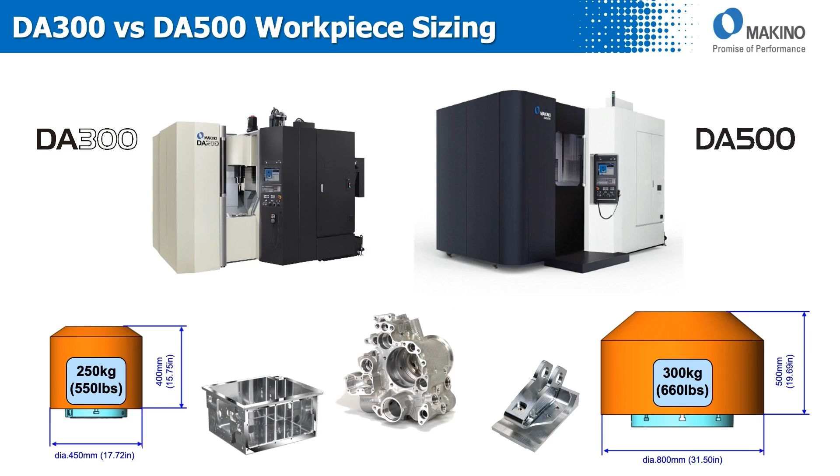That's a much larger workpiece, more capability, still full 5-axis functionality, but now we have that larger machine platform to take maybe something that was just a little too large for the DA300 and take it up to the DA500. Here's the standalone layout for the machine. Good access to the operator area, clear access for the operator to get inside the work zone.

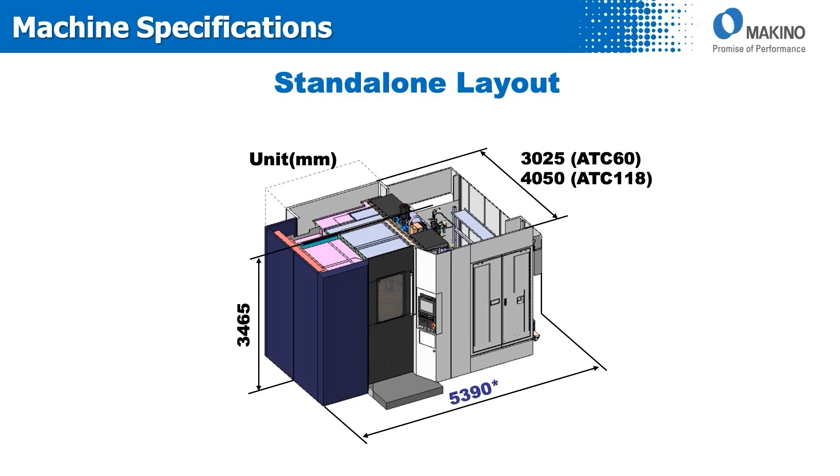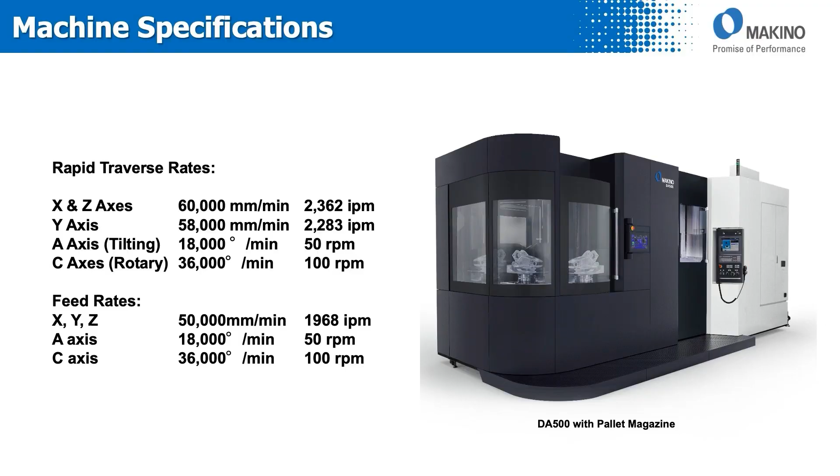You'll notice also in this slide, we showed dimensions for a 60 tool magazine and the 118 tool magazine. On the rear side of the machine, you can see that the entire length of the machine is just over 5 meters long. That also includes the lift-up chip conveyor. Here are some basic specifications for the machine itself. Here's a small animation showing the kinematics of the machine.

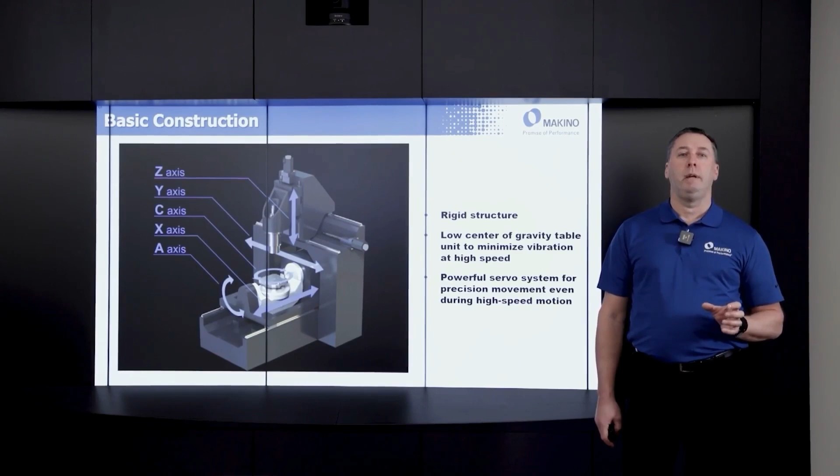If you look at the structure, the vertical structure of the machine, you notice the columns on either side of that x-axis. Those are very large, heavy columns, lots of mass, as well as the lower section for our x-axis provides a very low center of gravity for that workpiece as it's moving. Along with a powerful servo system, this gives us that very tight precision movement, even when we're moving at very high speeds, moving that part around, trying to get to different features.

Looking at the construction, let's take a look at the y-axis construction. You'll notice on the y-axis, we have one single ball screw, but we actually have 2 servo motors on there. Those 2 servo motors allow us to get twice as much power in that same area of the machine itself. We have 1 screw, 2 servo motors, much quicker positioning capability, much better accuracy, reduced torsional wrap-up of the y-axis ball screw.

For the x-axis, we have a very large moving mass there. So in the design of the machine, we have not 1, but we have 2 ball screws for the movement of the x-axis. 2 ball screws, 2 independent servo motors for those, working in tandem together.

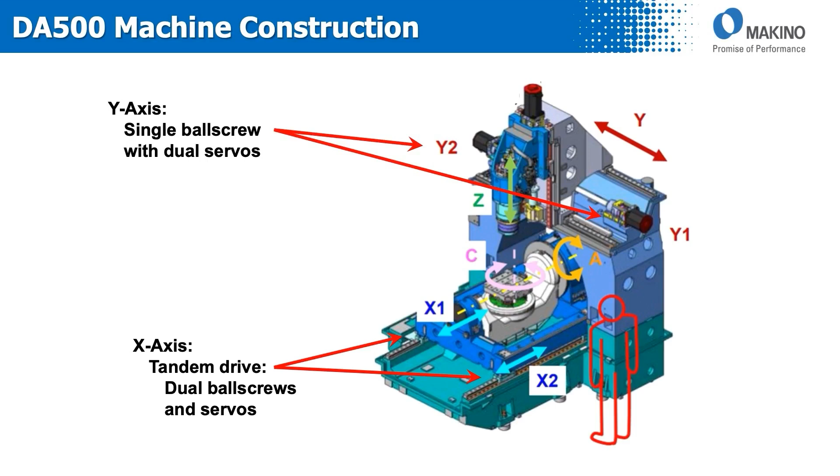Let's look at the column structure for this machine. In the left-hand view, you'll see a traditional design for a vertical machining center. You have the column base, then you have a saddle attached, and that saddle facilitates the installation and movement of the spindle further out front. In this arrangement, you'll notice that the spindle is a significant distance away from the column.

Looking at the DA500 on the right-hand side, they've taken the saddle and installed it on top of the column, thereby reducing the amount of overhang for the spindle. This provides a much more stable structure, better performance, better cutting capability, better surface finish.

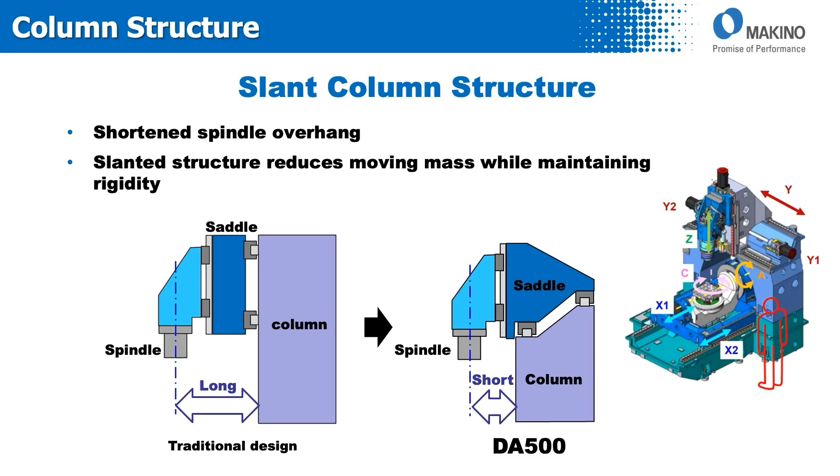Looking at the work zone also, here's full 5-axis motion. We've rotated the A-axis around, and you'll notice that as you're cutting, you have clear access between the workpiece and the lower part of the machine where the chips are evacuated in the center trough. This gives great evacuation for any material that's passing through the machine. So if you're doing large, bulky milling operations, billet, lots of chip removal, lots of material removal, we have the ability, as soon as those chips drop, to evacuate those chips right out of the machine.

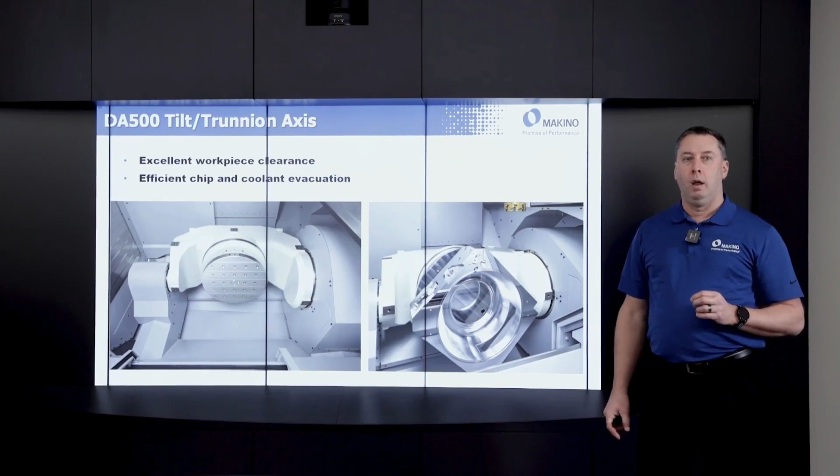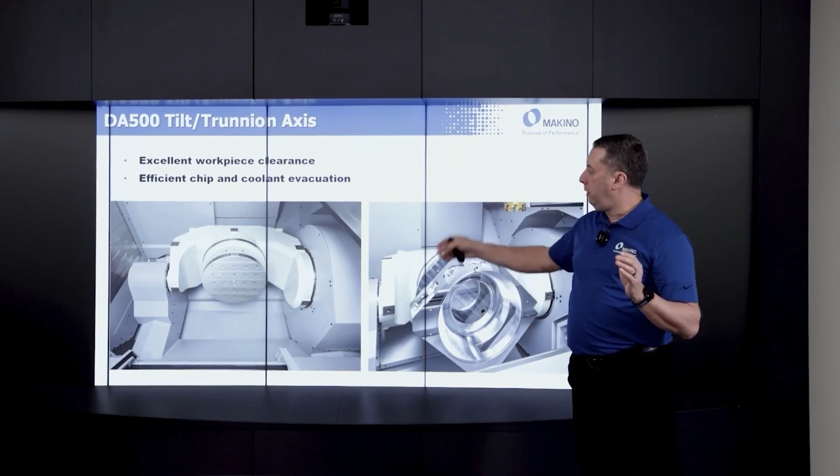Another thing to note also is, if you look at the perimeter around the sides of the machine, you'll notice that the walls are almost perfectly vertical. That way, we have the ability to shed that coolant very quickly, get it returned back to the coolant tank, evacuate those chips outside the machining area, and continue on processing without having to go back in, periodically cleaning anything out.

Let's talk about the trunnion construction. Many of the trunnions, more traditional design, those trunnions, they're looking at the motion. They're looking at taking that movement, getting that access to the workpiece itself. But they're not thinking about what it's doing as far as the center of gravity. That center of gravity is extremely important. We're trying to control that inertia at very high speeds.

What Makino has done in the design of this machine is we've lowered that center of gravity. You'll notice in the machine design, that A-axis is actually set down inside the X. We've taken that center of gravity and shrunk it way, way down. That way, we're controlling that inertia. We're controlling where that mass is moving. And by not having that mass hanging far out, we're able to provide a much better accuracy using this machine at higher speeds.

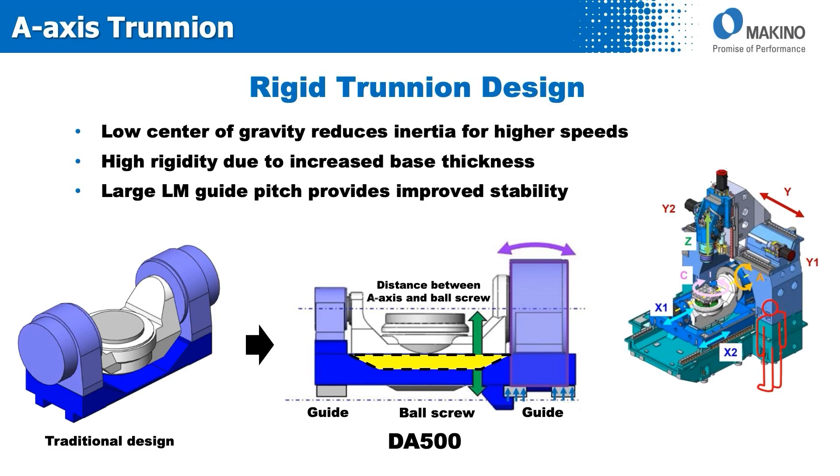Along with this, since we are moving at relatively high speeds with this machine, they've also implemented some other functionality in the machine to help control thermal stability. We're moving along pretty fast. We have 2 servos on that Y-axis. We have 2 ball screws and 2 servos on X-axis. The last thing we want to do is start to have some sort of thermal deformation for this.

As part of this machine's standard, we have shaft cooling on our ball screws. That means we're taking cooling oil, which is controlled by a chiller that's being monitored throughout the rest of the machine, monitoring that machine temperature. We're passing that oil through the ball screws, we're passing that oil through the support bearings, and we're controlling that thermal stability, any of that thermal growth for any of this axis, any of that motion. This helps to increase that positioning accuracy considerably.

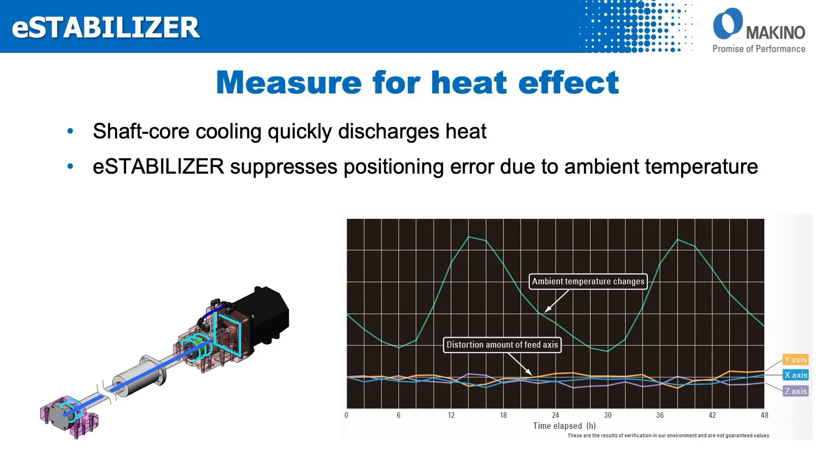Along with this, as you have your machine in an environment maybe where you have not such a great ambient temperature control, there's also a function called eSTABILIZER. That eSTABILIZER helps to suppress some of that positioning error as you see your temperatures fluctuate throughout the day.

Table and pallet specifications. We can do this machine in several different configurations. If you look far to the left-hand side, this configuration here is actually a physical table with clamping cones very similar to like a traditional pallet change style machine. In this configuration here, we have a square pallet on there, and that square pallet, even though it is square, it does have turning capability.

And that pallet can be taken on and off of there if you have several pallets, different workpieces, and you need to exchange those throughout the day. We have that ability to take those on and off of there. And this is a standard as it comes on the machine as we configure it here for our US market.

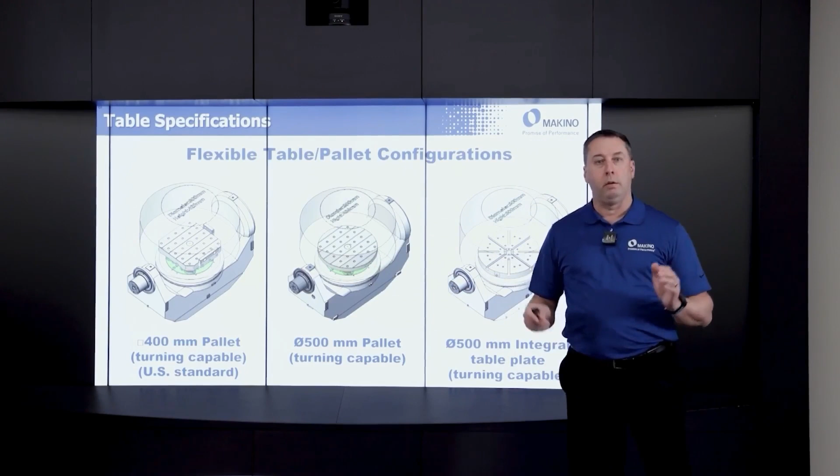In the center, new to this machine, we have a turning pallet. They made this pallet specific to the turning capability of this machine. 500 millimeter diameter, round pallet, perfectly balanced. One thing to note is that the cone pitch between these 2 pallets is identical, 200 millimeter cone pitch.

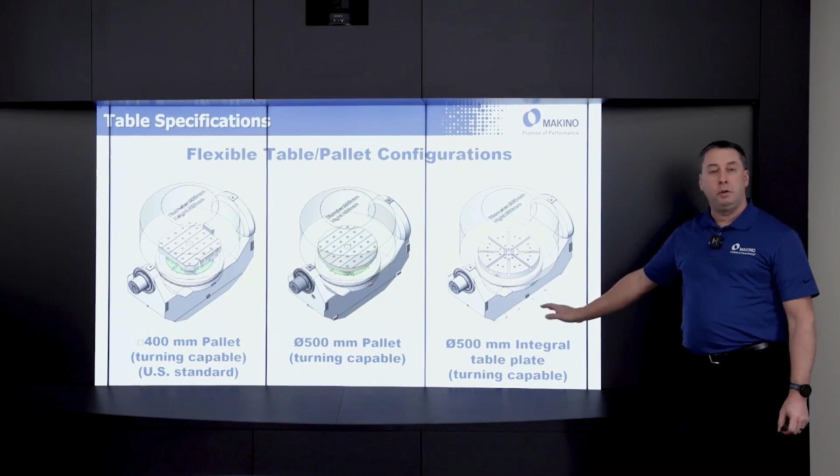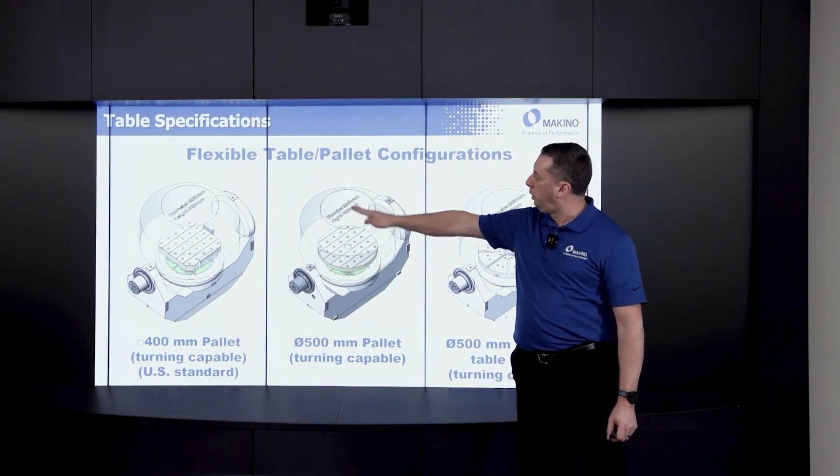The last option that we have is a fully integral table pallet configuration, meaning that this table is integral with the axis of the machine. This gives us the maximum height of the workpieces. You'll notice at the tops here also we have the maximum heights listed. The 400 millimeter pallet is just slightly taller, so we lose a little bit of workpiece height. Go to the 500 millimeter round pallet, we gain a little bit more, and if you need maximum workpiece height, you'd have to have some sort of an integral table configuration.

Here's a little bit better view of these workpieces. One thing to notice also is that we have full 800 millimeter diameter capability all the way across the product line. A little bit of variance in the overall height as far as your maximum workpiece height.

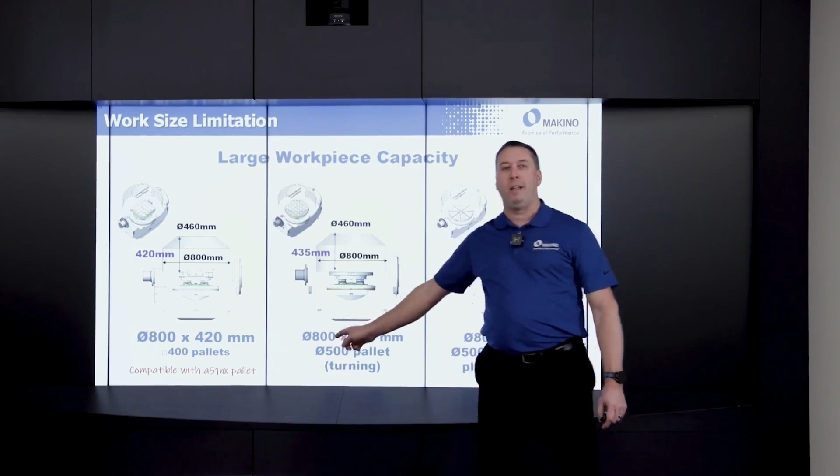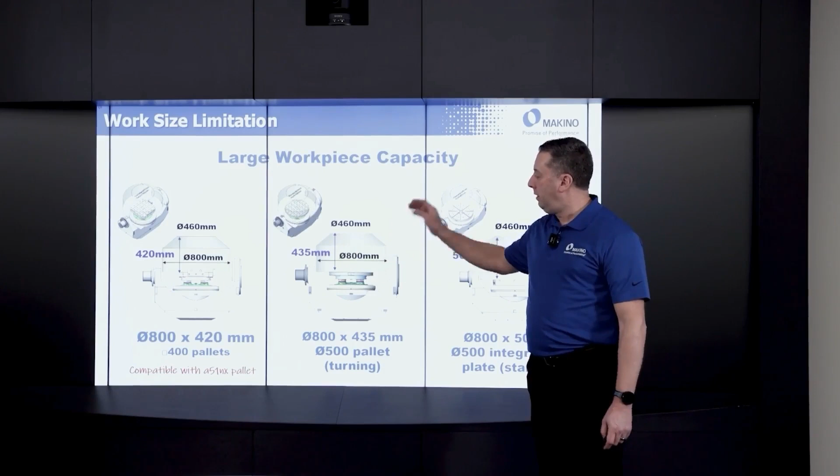But one thing to notice also is that this pallet, that square pallet that's on that machine, that pallet is fully compatible with our standard A51NX horizontal machining center pallets. So if you have work that you have turning requirements on or full 5-axis motion requirements on for machining, you can take that pallet and put it inside this machine, and it clamps up the same way it would on your horizontal machining center.

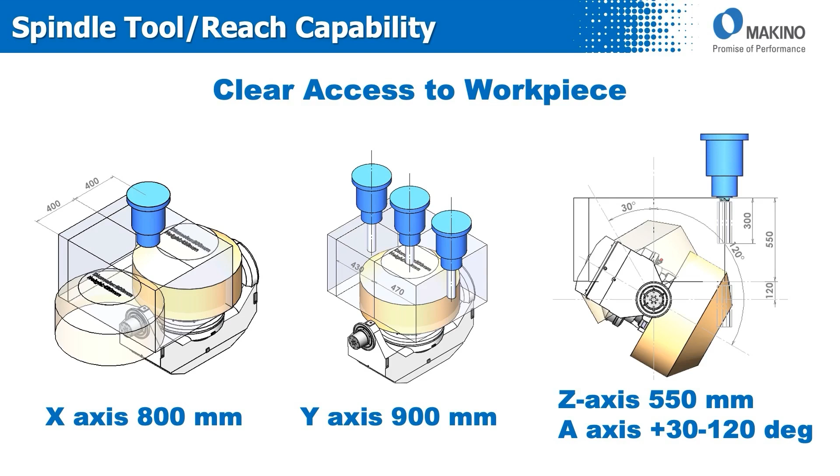Here's that 500 millimeter pallet we were talking about. As compared to the 400 millimeter square pallet, this pallet is just slightly shallower, a little bit less height on it, gives you a little bit more workpiece size, and it is round to help facilitate any kind of turning or full 5-axis motion.

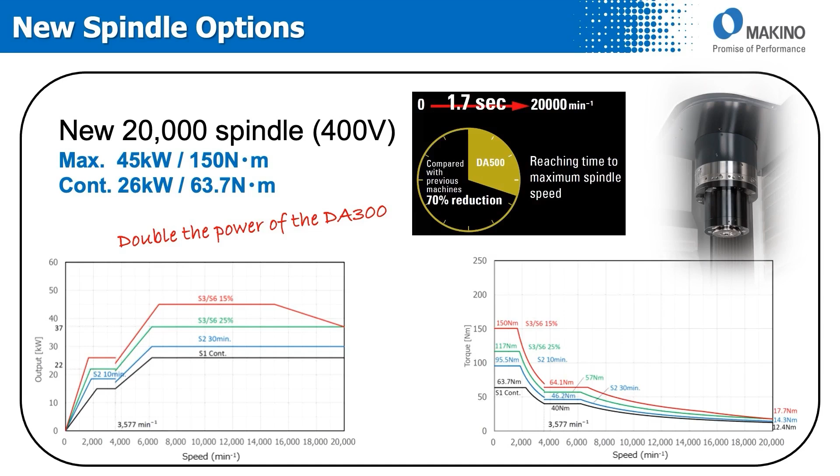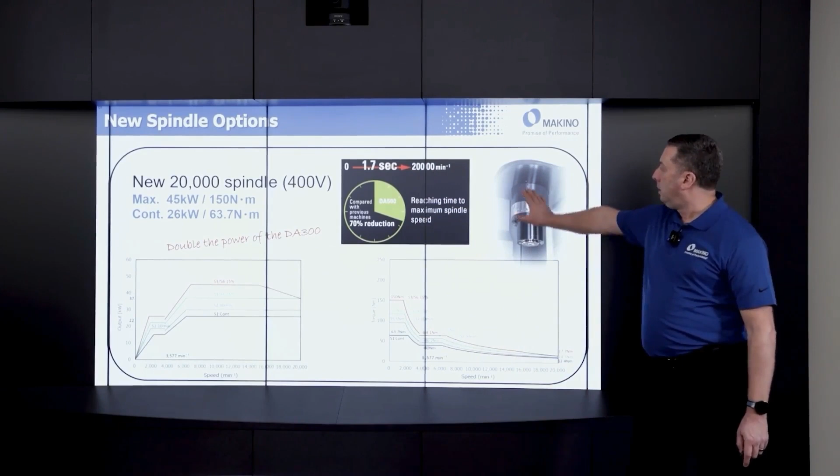Okay, this is where the special parts of this machine really come into play. When they designed this machine, they've designed brand new spindle options for this machine. This machine now comes standard in our market, if you were to purchase it, with a 20K spindle. And you'll also notice that power capability of this spindle is absolutely incredible. That's due to the new designs of the spindle, new arrangement, very good steady torque curve, different levels of running it at different capacities, and also very quick 0 to 20K ramp up time for that spindle shaft. Remember, when you're changing tools, when you're exchanging things back and forth, these non-cut times really come into play. This makes a very big difference in part processing.

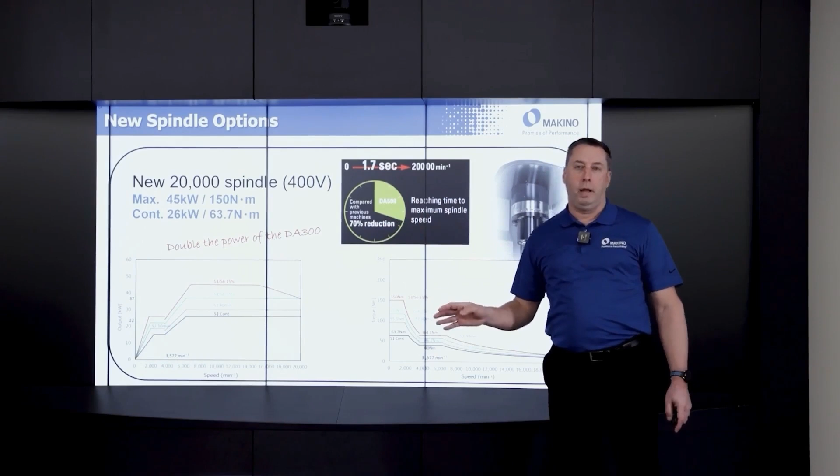If you're doing work where you require maybe more torque, got heavier applications, other different types of material, we also do have a 14K spindle option available as well. And we have some other product families out there. These power curves are very similar on this 14K to the 14K spindles in our a500iR horizontal machining center. So like I said, a little bit higher torque with the 14K versus the 20K. Just depends on the type of work that you're doing.

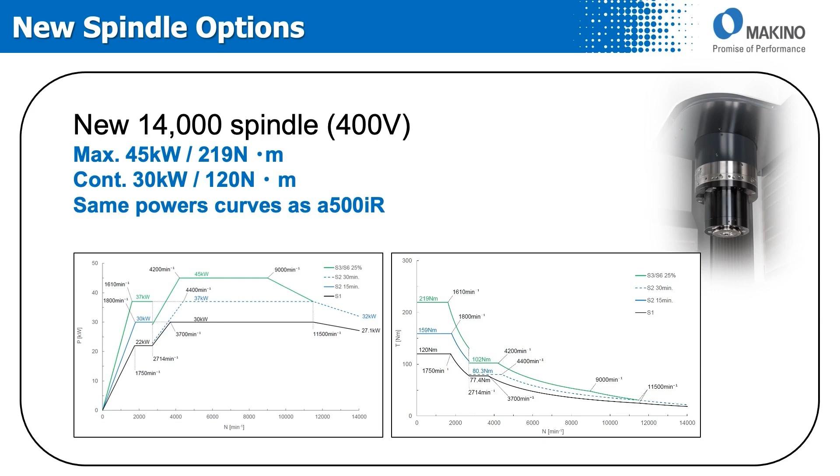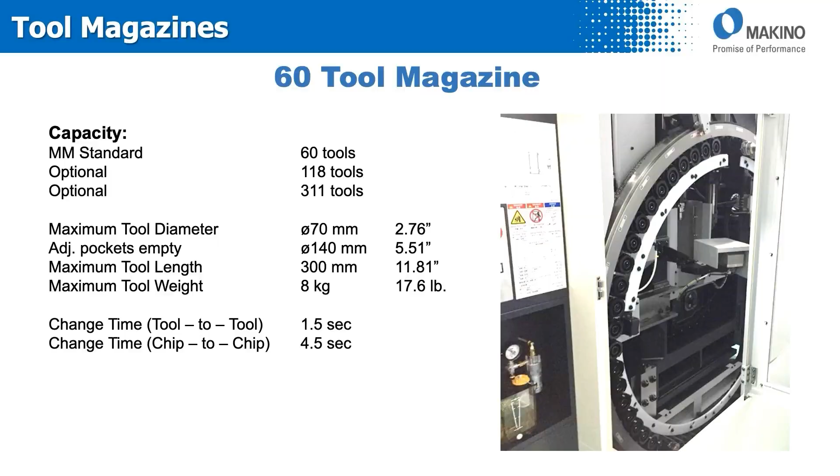Talk about tool magazines. Being that this machine has a really great degree of flexibility, we also wanted to provide the necessary tools for whatever your application is. So we can show here basic standard on the machine, 60 tool capacity. We show the diameters, length, tool change time, chip to chip, relatively quick. Along with this, we have the ability to take this 60 tool ring and now expand it to 118 tools.

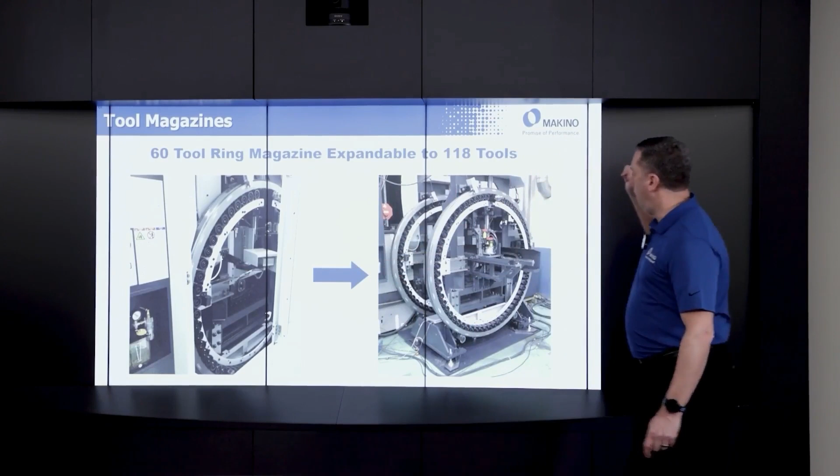So it means you can buy this machine as a standard with a 60 tool magazine. Later on, if you decide to put automation on the machine, add a pallet magazine, do other things with it, repurpose this machine, and as you grow, this might be something that's appealing to you. You can go from that 60 tool magazine up to 118 tools. And this magazine expansion is fully retrofittable in the field.

If you want to go one step beyond, you're intending to put this machine in a large automation environment, pallet magazines, robot automation, whatever it may be, and you have a very large family of parts that you're passing through here, you're going to need a large tool capacity for this. In this case here, we have a relatively new design for this. It's a 311 tool magazine, and this is fully integrated with the machine.

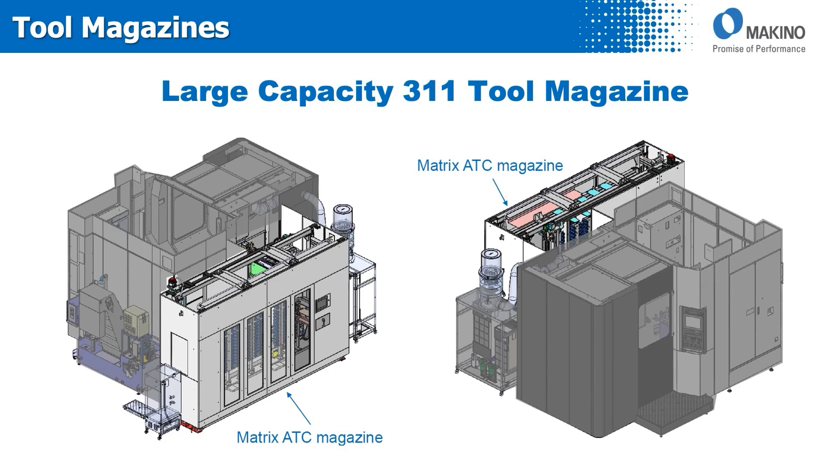We also have an HMI out at the tool magazine itself. The HMI allows you to go through, select tools, read in, read out, look at the tools in a tool load station on the side that allows the operator to pull tools out very conveniently, very easily, access those tools, change them out, service them, whatever is required.

Okay, we talked about the DA300 early on in this presentation. Something that's unique to the DA500, not incorporated into the design of the DA300, is turning spec capability. On this DA500, we have now incorporated the ability to do full turning operations on this machine. So not only do we have full 5-axis machining capability, now we have full turning capability as well.

So up to 800 RPM as far as the workpiece rotation, 800 millimeter diameter, 435 millimeter max workpiece height with a round pallet, and also 300 kilograms of payload capacity. That's a pretty large payload that you're spinning around if you think about it at 800 RPM.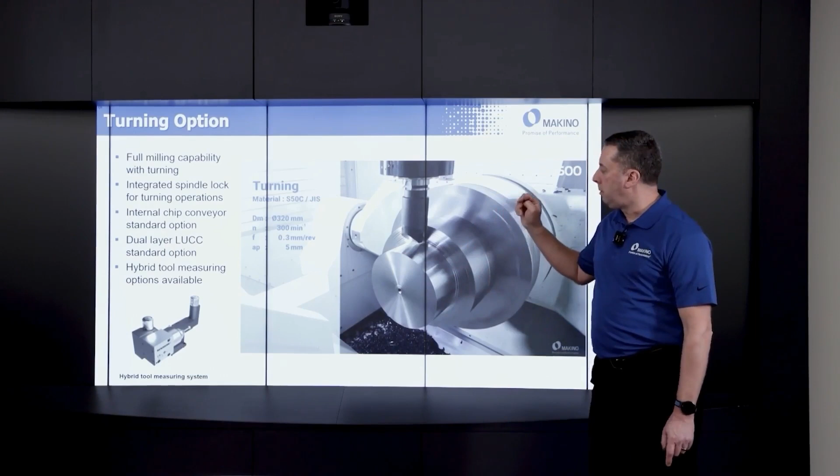Along with this, because it is more of a hybrid operation where you're going to have milling and turning, you're going to need some sort of a measuring device that's going to be able to do that for you in both fashions. We do offer options for hybrid tool measurement, laser tool measuring for typical milling operations, as well as some sort of single point measuring devices for your single point tooling for the turning operations.

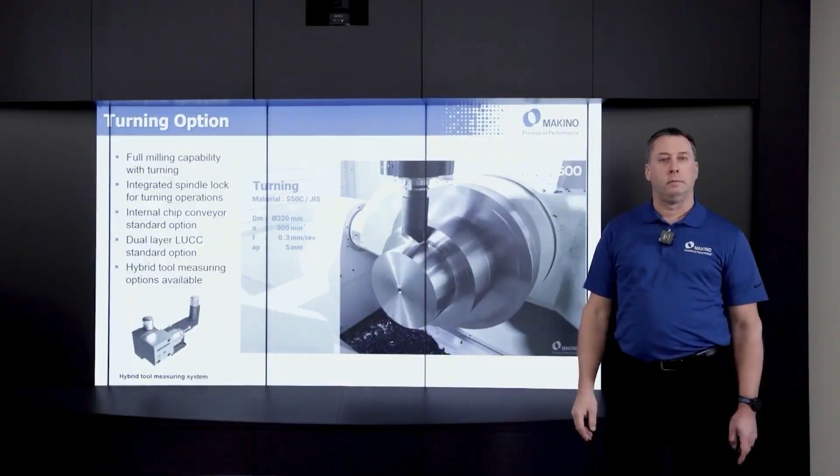Some of the other features that go along with this, for people that are more used to milling or more used to turning, since this machine does incorporate multiple facets of that, milling and turning, they wanted to make sure that when you're in either operation, you have that ability to fully understand what's going on. In this case here, if you're in milling only operation, we show a blue background or a blue banner at the top of the control panel. If you're in a turning operation, we show a green background. Very clear, very easy to understand when that's going on.

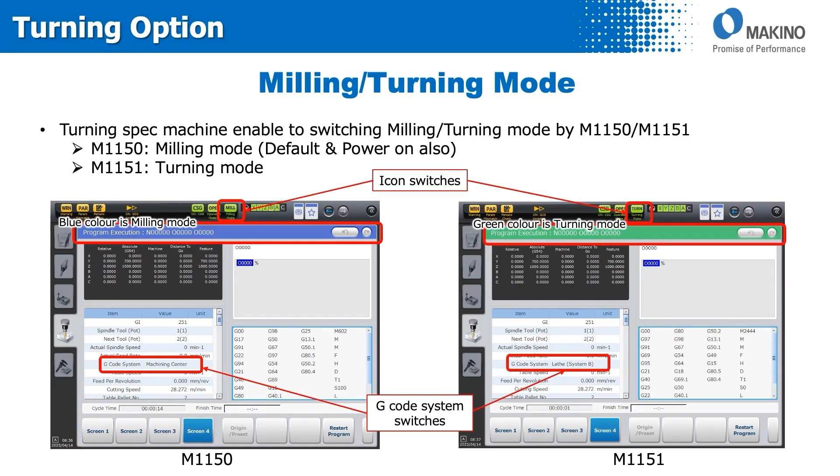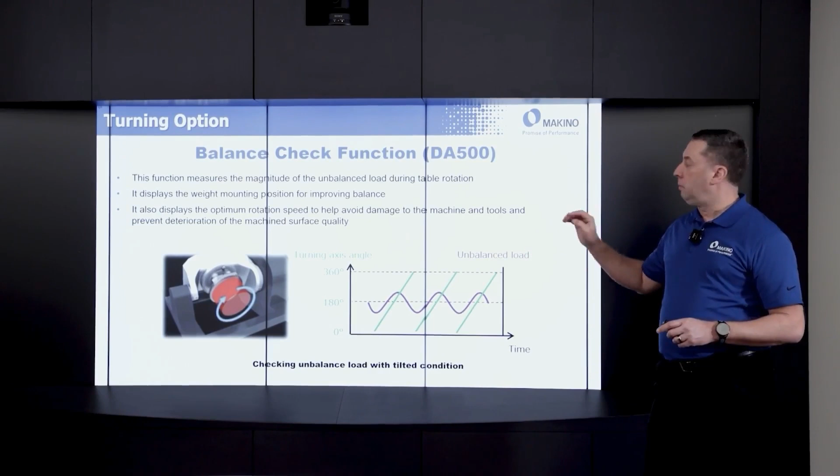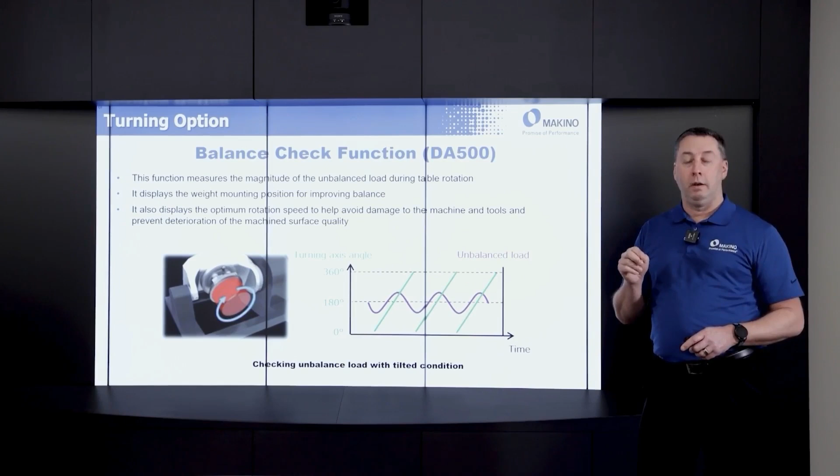We also incorporate other functionality into this, knowing that you could have potential for maybe unbalanced work pieces. You could have some changes in the mass of work pieces as you mill away and then have turning operations. We have a balance check function that's incorporated into this. And you can go through and check the balance of your workpiece. It'll also display for you the optimum rotation speed based on the imbalance that you have in that workpiece. That way you can maintain that very good machined surface quality. And it also helps to provide a little bit better longevity to the machine itself.

Here's the balance check function operation screens. Everything's listed out here. Highly intuitive, showing you how to start measuring, showing you recommended speeds. When you go through and do this measurement, it will index around and actually get you to the point where you can add weights or subtract weights from your workpiece to get it into better balance. Gives you a good top-down view of it. Shows you the recommended rotation speed after your initial balance check. And then it shows you the balancing of the workpiece itself. Very intuitive guidance. Great, easy for operators to walk through this.

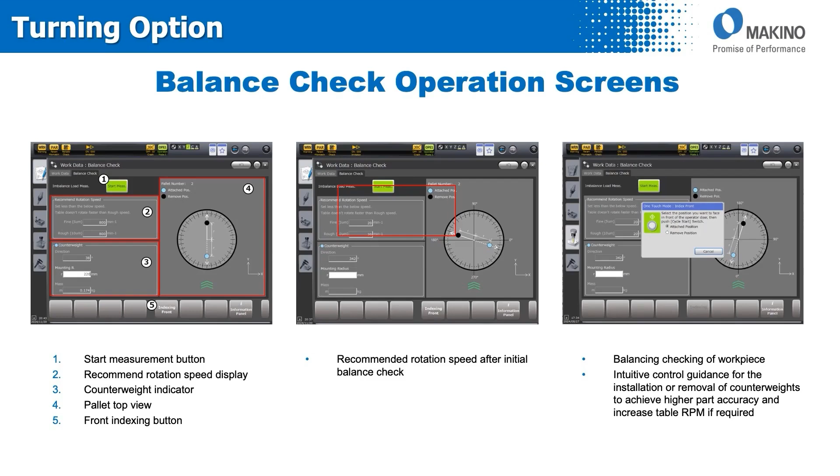Since we do have a turning functionality on this machine, there are things we have to do as far as the spindle and holding these tools in position. Traditional spindle orientation isn't rigid enough for this. So what we have done is incorporated into the design of this machine a lock spline locking device built into the body of the spindle. This is incorporated into the body.

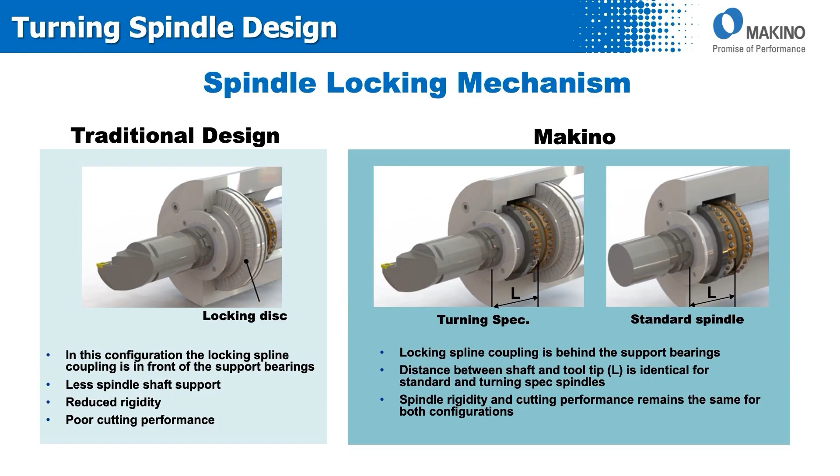Now there are other traditional designs out there where they take this device and just add it as a separate module, maybe just to the face of the spindle. And by doing so, it does lock the spindle, but that locking capability doesn't afford you good support for the spindle and the tool itself. You'll notice here that in this one, the locking device is forward of the bearings. In the Makino designs, we've taken that locking device and incorporated that to the rear of the front support bearings.

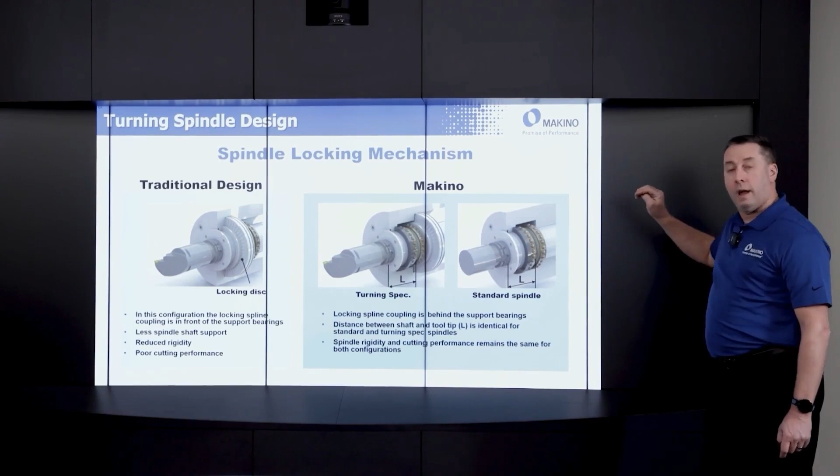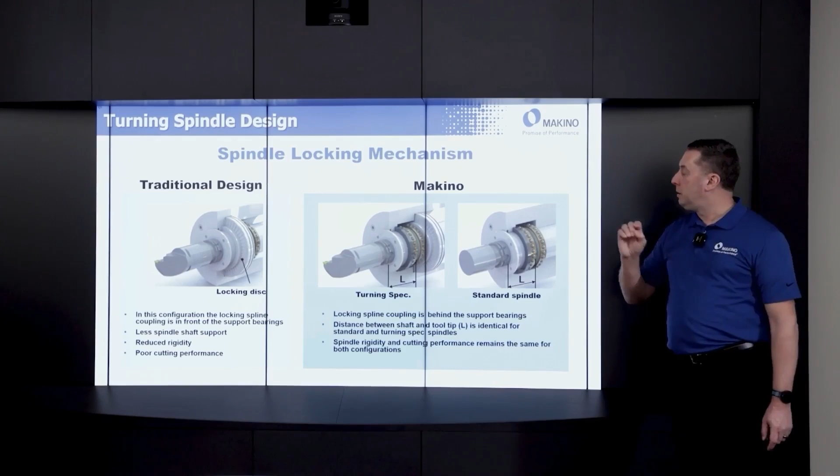So regardless of whether you have a spindle which is designed for turning and milling capability, or if you have just a traditional 5-axis DA500 with just the milling spindle, support and rigidity of that tool is always maintained the exact same way. You will not notice any difference from one machine to the next, whether it has a turning spindle or a traditional milling spindle. Good rigidity, good cutting performance, and remains the same for both configurations.

If you do have this turning option, indexing accuracy for this tool is paramount. Traditionally, on this machine as it comes, it only comes with HSK spindles right now, 20K or 14K. But when we have this turning functionality, we have to have a different type of tool for the indexing accuracy when you're doing the turning operations. So if you have just a traditional milling machine, HSK A63 would be the standard. Turning functionality, we have now incorporated HSK T63.

We've taken that distance from the tool body and out to the front edge and decreased that some, giving it more rigidity, more capability to hold on to it. Along with that T-style tooling, the tolerances between the drive keys are different. The T-style tooling is significantly tighter tolerance configuration. So when you're trying to maintain that indexing accuracy of that tool as it's contacting the part, this will provide you that better support, better accuracy, better surface finish.

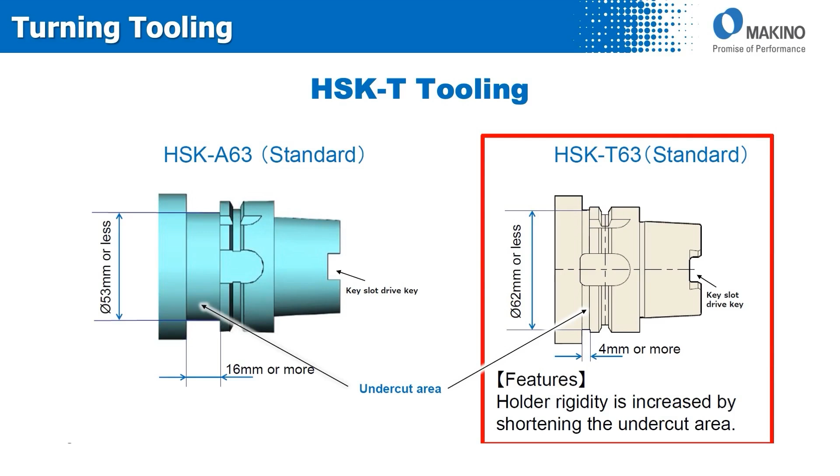Along with this, we have many other functions and features that come along with the machine. Thinking about what you're going to do with the machine, maybe not now, but maybe in the future. So here's something to think about. As a standard in all configurations of machines that we bring into our market, meaning the US market for the DA500, we have incorporated as a standard on this machine a robot shutter. So when you get this machine behind these doors at the far side, you have this robot shutter that's hidden in behind there. Automation ready, very easy to retrofit magazines or robot automation.

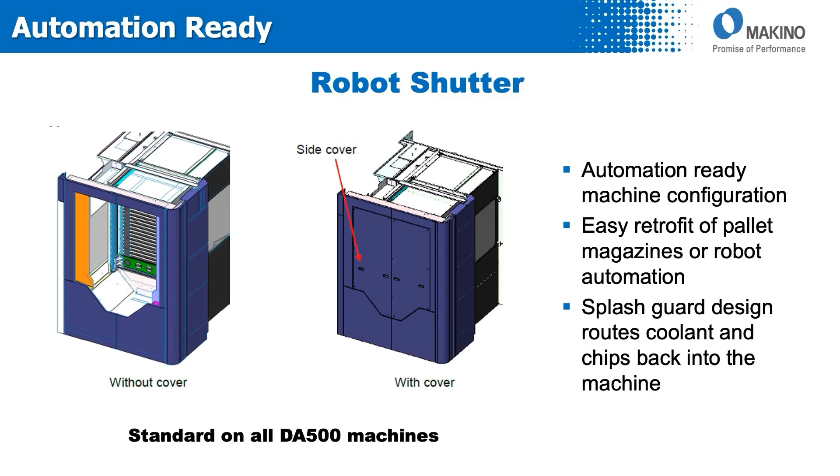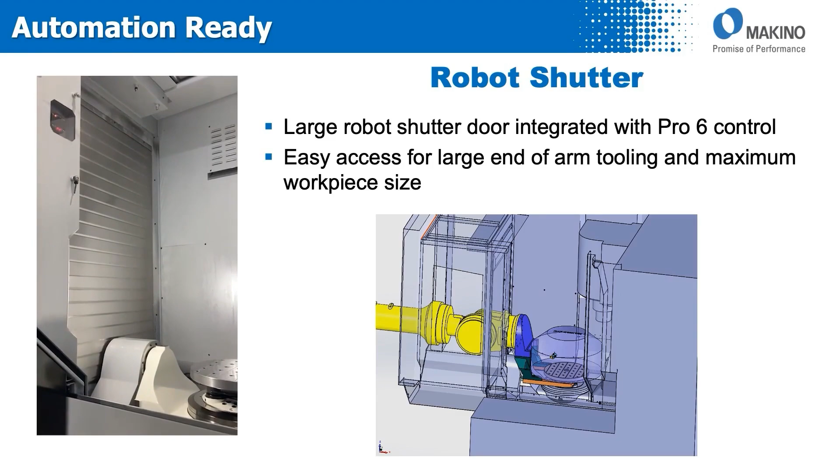Here's an example of maybe robot automation as you were to put it on there. This view here on the left-hand side, it shows the shutter operation. And if you'll notice, this is a very large shutter, and I'll give you some perspective of what's going on here. We'll show a view right here, and this is some sort of end-of-arm tooling with a robot that's presenting the pallet inside the machine.

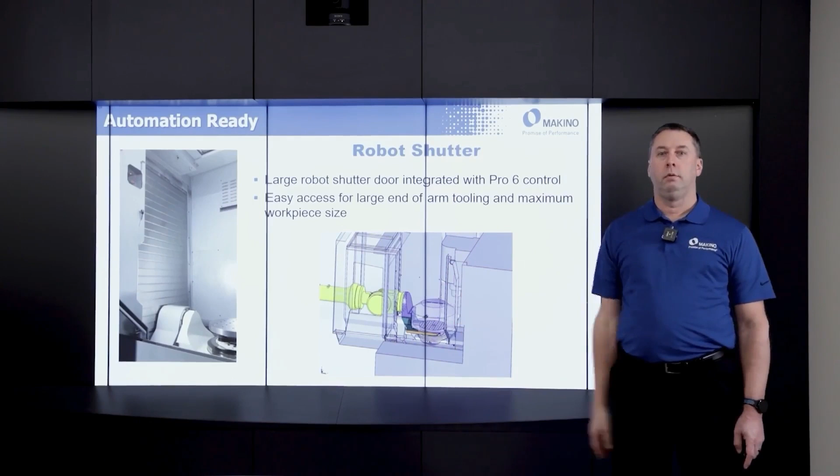This end-of-arm tooling is actually a very large, oversized FANUC robot. So no matter what your automation type is, even if you use a very large robot and you have this machine in other applications, or if you get the correct size robot, we have full clear access for that robot to get inside the machine and present the work to the table and clamp everything in place.

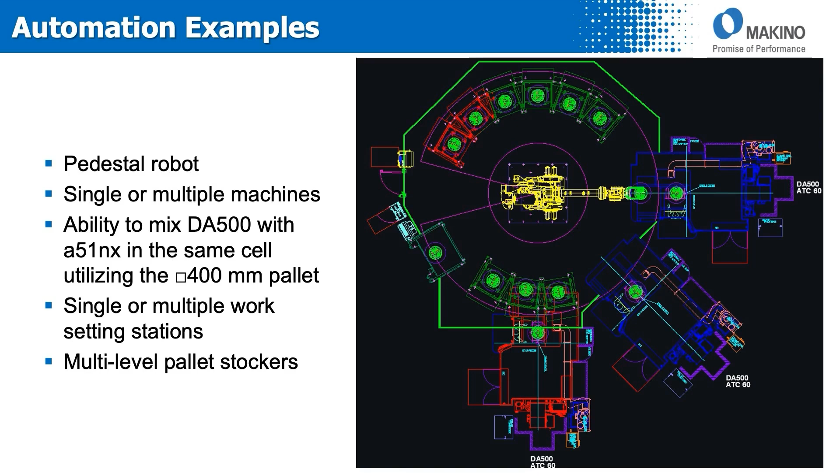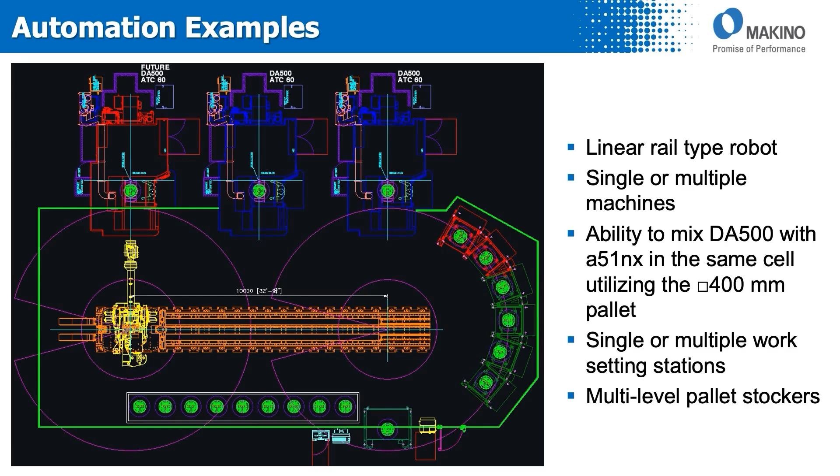So you could possibly have maybe a couple of A51NXs in here. You can have multiple DA500s with an A51NX. Any combination that you want, but from a pallet handling capability standpoint, it's the same for both. Because that pallet can now go not only in an A51NX, it can also go inside the DA500.

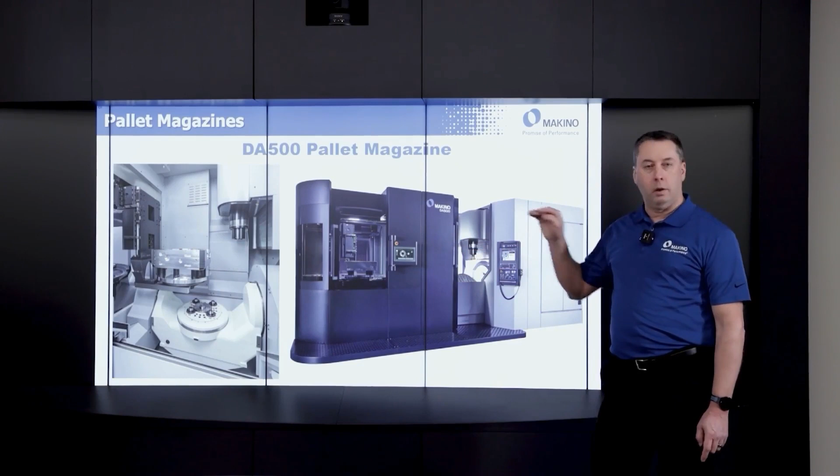And the good thing about these pallet magazines is you can purchase a machine as a standalone machine and then integrate this pallet magazine later. This is something that can be done in the field, and at any point in the future, if you want to change the configuration, you have that capability. Highly flexible. The other thing we had also talked about is when you're adding that automation on, if you had purchased that machine with just the 60 tool magazine, you have the ability to expand up to that 118 tool capacity. That way, when you add that automation, you'll have all the necessary tools required for that application.

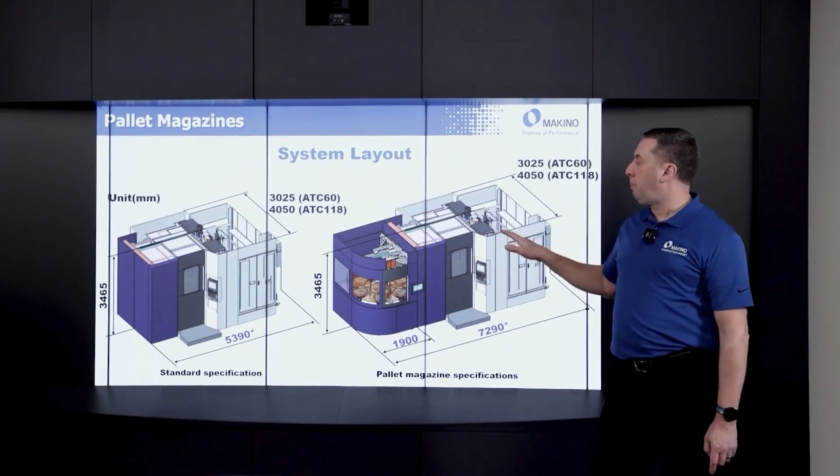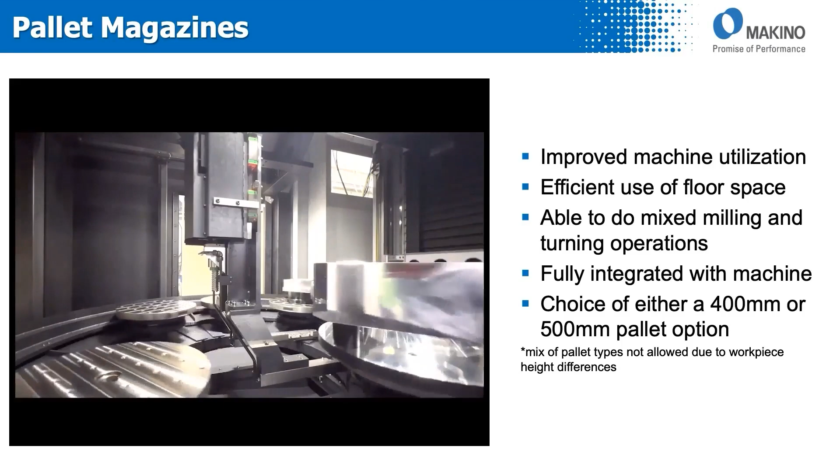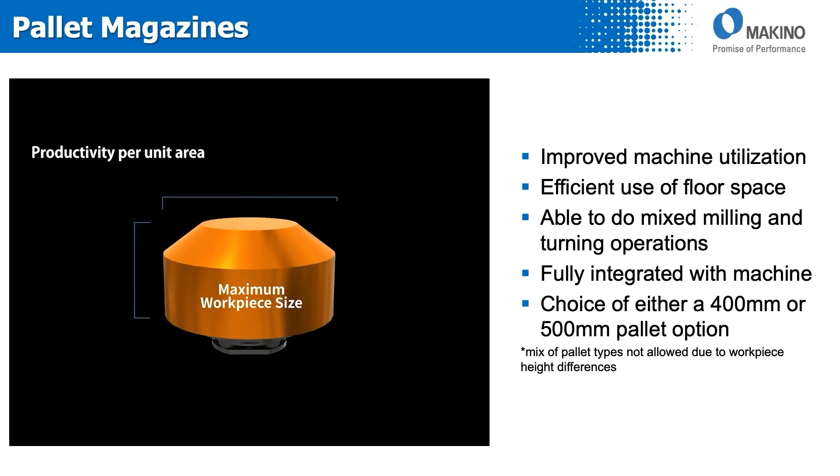So pallet magazine, clean, neat, efficient handling of the pallet, compact, efficient use of floor space. If you have mixed milling, mixed turning applications, you can do everything inside of there, fully integrated with the machine control, and you have the choice of either a 400 millimeter or a 500 millimeter pallet.

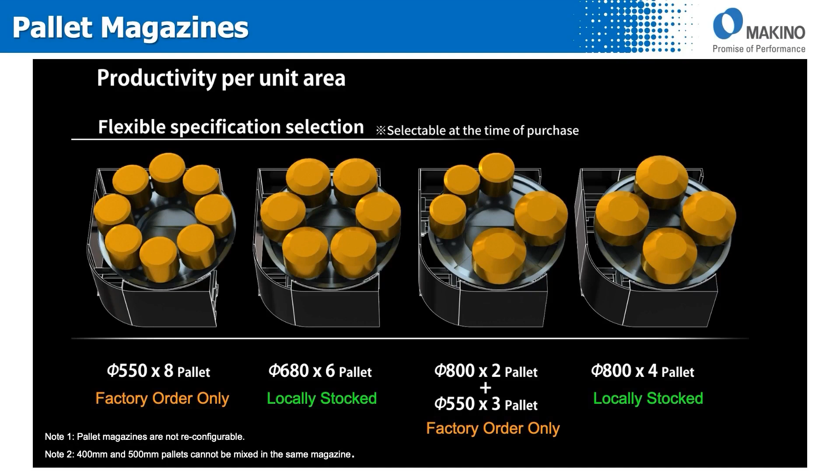Pallet magazines. We had just talked about the ability to retrofit a pallet magazine on here. Now, depending on what kind of work you're doing, you may have requirements for smaller parts, larger parts. You may be a full-up production shop where this machine is dedicated to doing certain work pieces all the time. Maybe they're smaller work pieces. Or maybe you're a job shop and you don't know what's going to pass through your facility, what you're bidding on, what the next job may be. We have the flexibility to configure this in different ways for you.

First one on the left-hand side, if you're doing smaller work pieces, we have the 8 pallet magazine. Your maximum work piece diameter will be 550 millimeters. Second selection, 600 millimeter or 680 millimeter diameter work piece shrinks you down to a 6 pallet configuration. And then maybe you're a job shop and you have mixed work, some small work, some larger work. We have the ability to mix both in the same magazine. In this configuration, we have 2 pallets at 800 millimeters in diameter and 3 pallets at 550 millimeters diameter. Last configuration, if all you're doing is large work, 4 pallet capacity with the full maximum work zone capability on the axis, 800 millimeters.

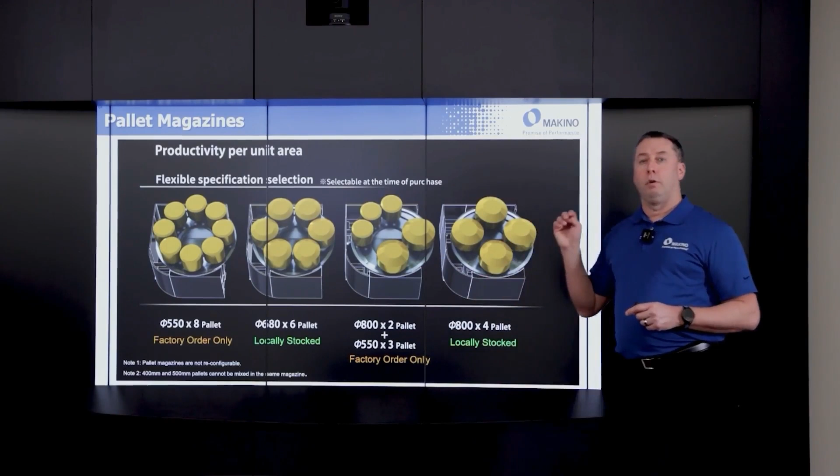One thing to note also is that we stock the 6 pallet magazine and the 4 pallet magazine as a standard. So if you decide to buy the machine and retrofit this later, we have these pallet magazines locally stocked. Always check with your local sales representative for stocking and when these will be available.

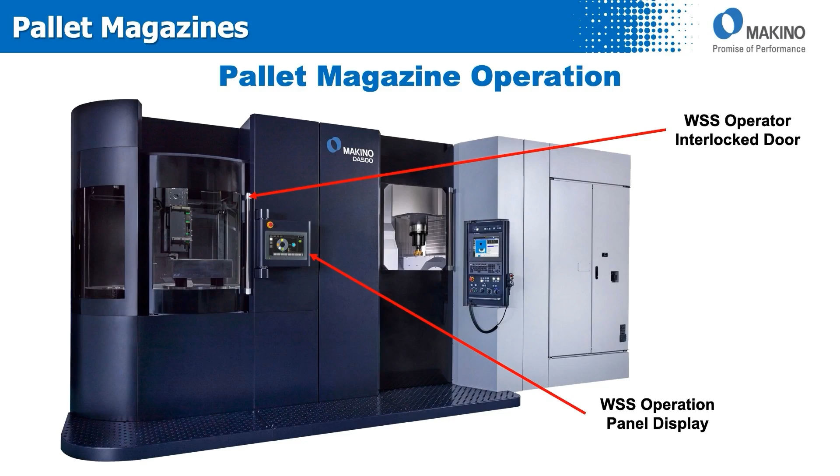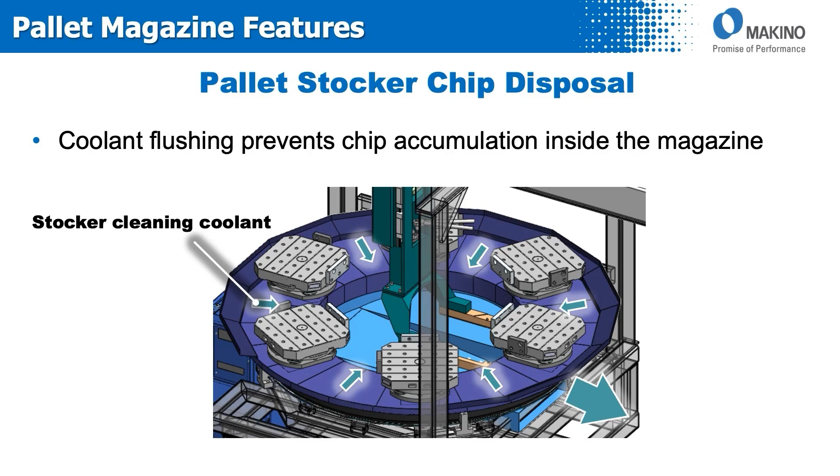Looking at the pallet magazine, some of the features: coolant flushing. Since this is going to be continuous operation, even though you've tried to flush your work pieces off inside the work zone at the end of your process, chips and coolant still fall off. Built into the design of this machine, we have a complete drip tray and splash guard design, where everything that falls inside the pallet magazine or off your pallet will funnel back into the body of the machine, into the center trough, and be evacuated by the lift-up chip conveyor.

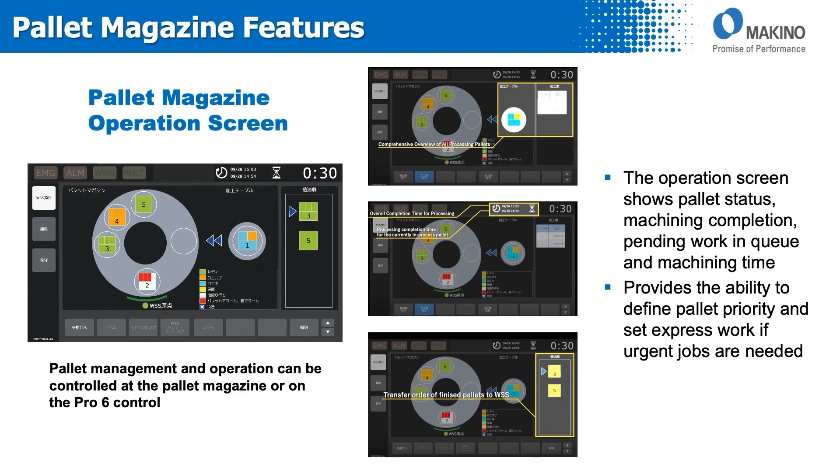Some of the features of the pallet magazine: you notice here we have some of the operation and control on the left-hand side. You can select what work faces you have on there. You can designate 2-face, 4-face work pieces. You can show what's being processed, what pallets are passing through, what machining completion time is looking like. You can define priority for the pallet if an express job is going through, something you need to turn out very quickly in your queue of work. And you have the ability on the control to designate and control this.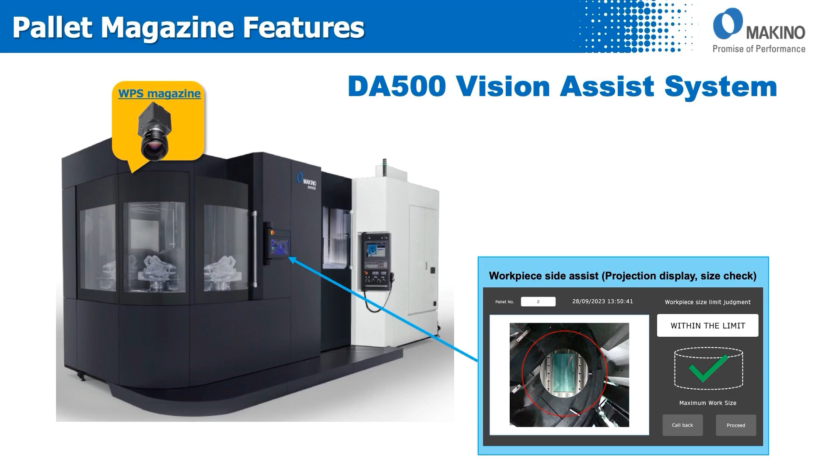Along with this, since we're setting up work pieces of different sizes, we want to make sure that we don't damage the machine. So incorporated into the design of the machine is a vision assist system. This vision assist system looks at the workpiece inside the pallet magazine itself, and it'll tell you whether you're within or outside the limits of the maximum workpiece size for that machine.

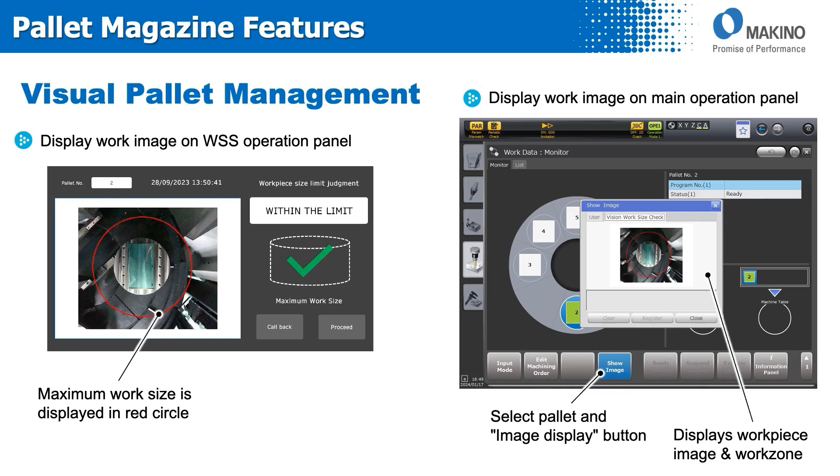A little bit better view of it over here. We display the image. Max workpiece size is way out here. Obviously, this workpiece that you see here, everything is good. We can show this image as it's looking from above and also display it on the other side of the control.

Now, like I said, it's looking at that workpiece size. After you close that work setting station door, that camera looks down at that workpiece, that software looks at it, analyzes it, looks at the diameter and yes, the height of this workpiece, and that system understands whether or not you're going to meet the requirements. If you're outside the maximum workpiece diameter size, it will warn you of that so you do not have any kind of collision inside the work zone of the machine.

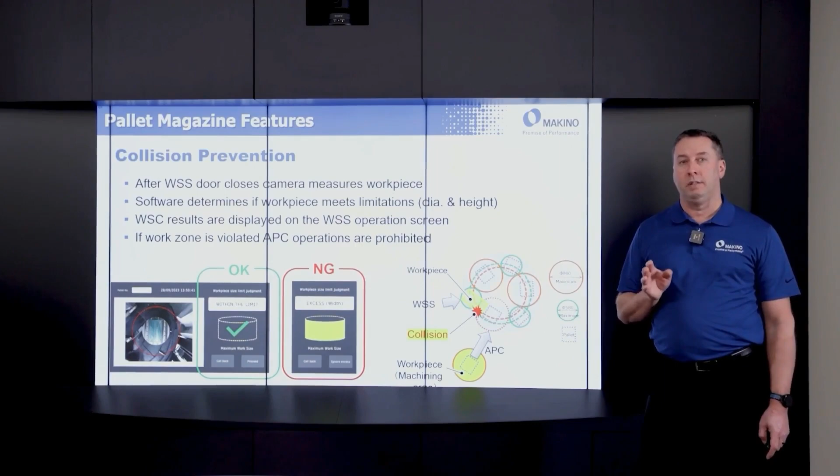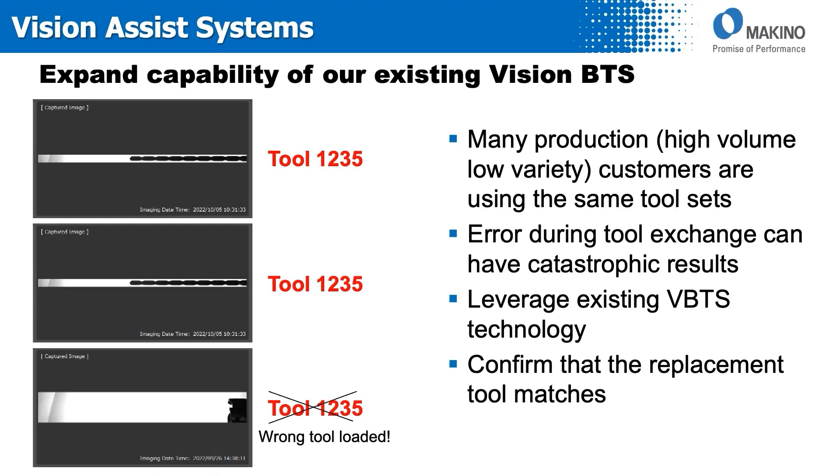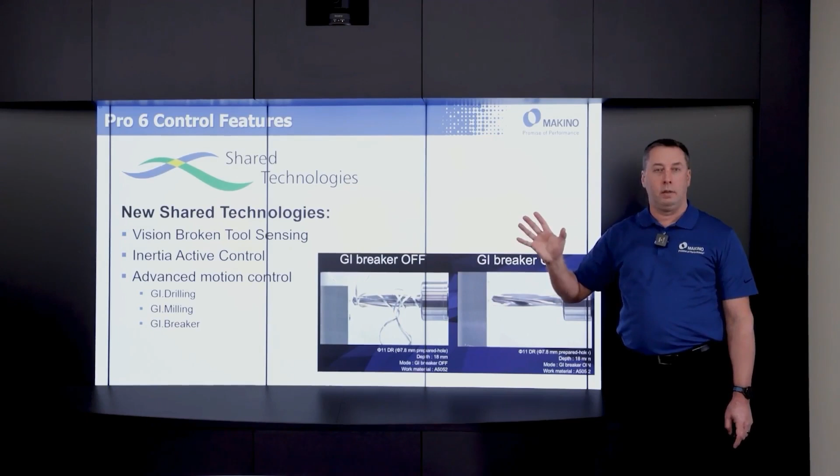So some of the other shared technology: we talked about vision broken tool sensing, also inertia active control, controlling the motion of the machine depending on how much weight it has on the axis. Advanced GI drilling, advanced GI milling, also functionality for GI breaker.

The coolant system on the machine itself is really thinking about the production process and about the machine running long term. Incorporated in this coolant tank, we have agitation or circulating nozzles that move coolant inside the tank. That way we ensure that we are not settling any of that particulate out inside the coolant tank. Along with that, it comes with a large hydrocyclone. We're keeping everything stirred up inside the tank. We have the optimum time now to take that coolant and pass it through a separator and help extract any smaller contamination that passed through.